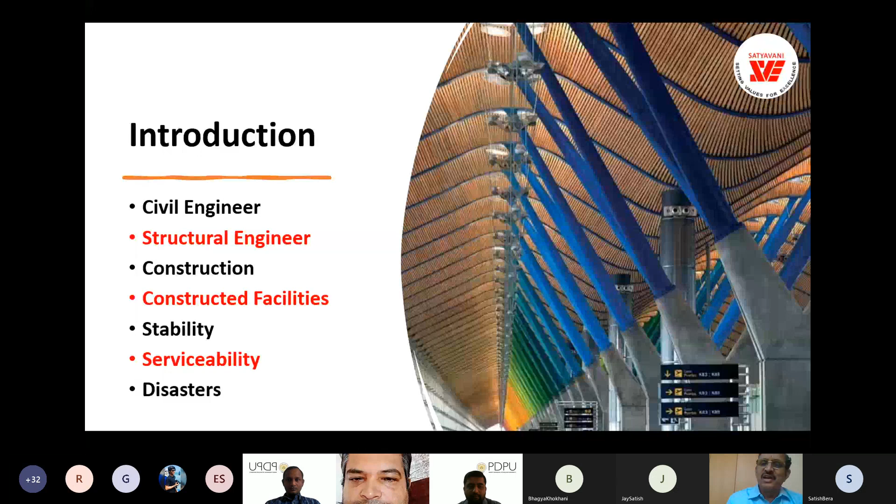That is cyclones. So we deal with cyclones, tsunamis, earthquakes, flooding - all these things. That is the beauty of a structural engineer. We understand all the loadings we have to deal with, we understand the materials we can use, and we know the construction technologies, whether it is precast, the latest 3D printing, or pre-engineered steel structures. That's the beauty of structural engineering, and the pride of a structural engineer, to know how to make a structure live.

So with this brief introduction, I'll start the overview. We deal with structures in housing, transportation, buildings like convention centers, exhibition centers, auditoriums, industrial buildings, power - which is a very essential thing - power generation, transmission, distribution, and end-user utilization. Next is communication. If we are working today on the internet or telephone, it is all communication.

And then irrigation - irrigation is mainly for water supply for agriculture. That is a very important thing. We all know the food - we deal with roti, kapda, or makan. Kapda comes from cotton, agriculture, and industries, textile mills, which we design again, and then garment manufacturing. All these we deal with - roti, kapda, or makan. This is the most important role of a structural engineer, and in general, a civil engineer.

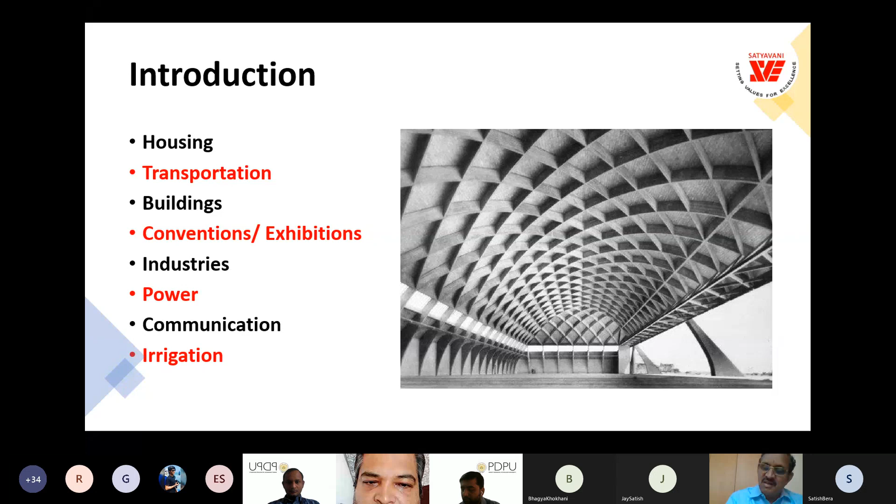Sports stadiums - we know every time Olympics happen, we see a new type of structure, whether in China, Britain, or now Tokyo. Unfortunately, the Tokyo Olympics didn't happen. And tourism, entertainment, hospitality, leisure - we had opportunities to work on leisure projects.

And temples - the Indian heritage, we all know how beautifully temples are built, and they're also structures. It will be a good subject for us to study even those structures, how they are designed, how they are concentric. The theory of temples is from Sthapatya, which is part of Vastu, so that is also good structural engineering to learn. And bridges - we deal with connecting two ends of a river or two separated facilities. Space structures - that is now gaining importance.

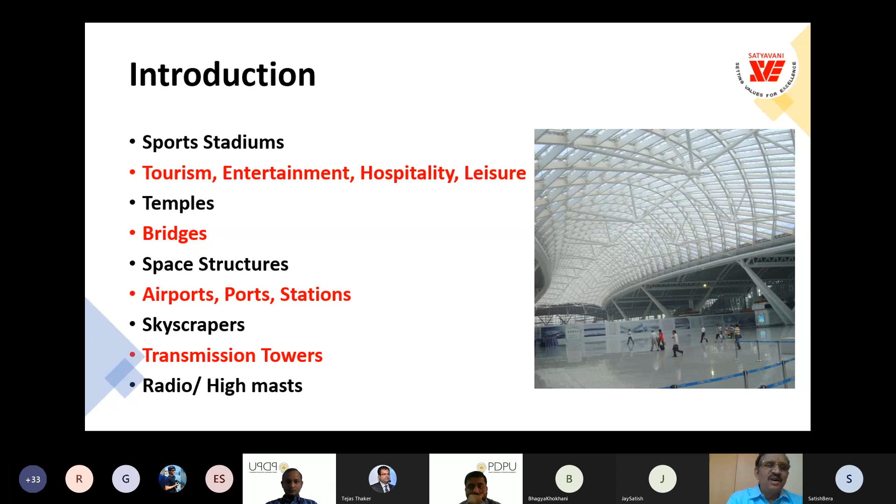We are talking about hotels on Mars, communities on Mars, and so we have to also specialize in space structures, airports, ports, railway stations, bus stations, and skyscrapers. High-rise construction is the norm of the day. You must have seen recently in Dubai, they are coming up with the longest cantilever structure. So we have to keep updating ourselves, with transmission towers for power transmission, radio high masts for FM and all that. There are so many things we can specialize in any of these areas, and I had the opportunity to work in all these domains.

So what is a structure? Let us understand. The role of a structure is to cover, to connect, to support, to protect, and to hold. I'll not go into the details, but just remember these words, and if anyone has any doubt about the terminology I'm using, you can ask me towards the end. A structure must also transfer loads, isolate sometimes in earthquake criteria, and elevate overhead tanks.

Any structure should deal with loads, and we should understand the materials used. We also have to keep in mind the possibility of blast, dynamic loading, impact loading, flooding, cyclone, etc. Earthquake resistance is compulsory for any structure, particularly in India, since we are highly earthquake prone with many seismic zones, and we have to design accordingly.

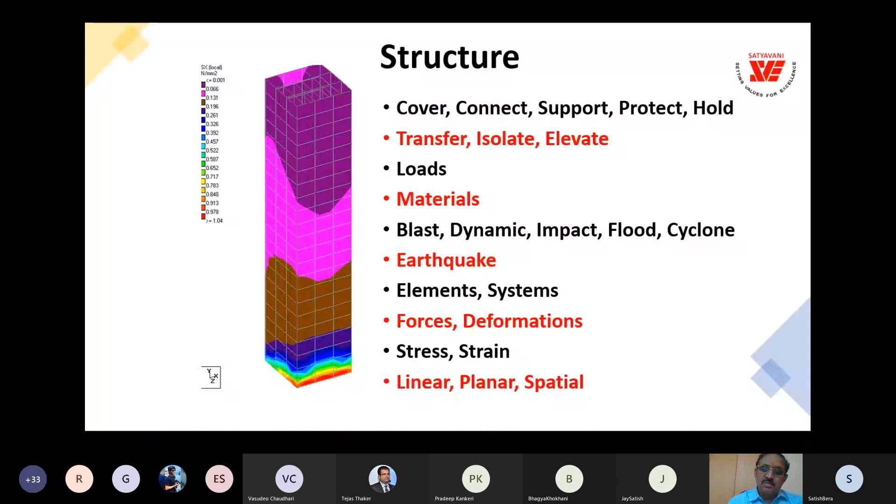We should understand structural elements and systems. Ultimately, we deal with the forces in the members and deformations in the structure or structural elements. We have to keep the deformations within serviceable limits, and design for the forces, allowable stresses, whether it is flexure, axial, or shear, and then strains, plane stress, plane strain, and so on. There are types of structures: linear like beams, planar like slabs, and spatial like domes and 3D spatial structures. So this is about a structure.

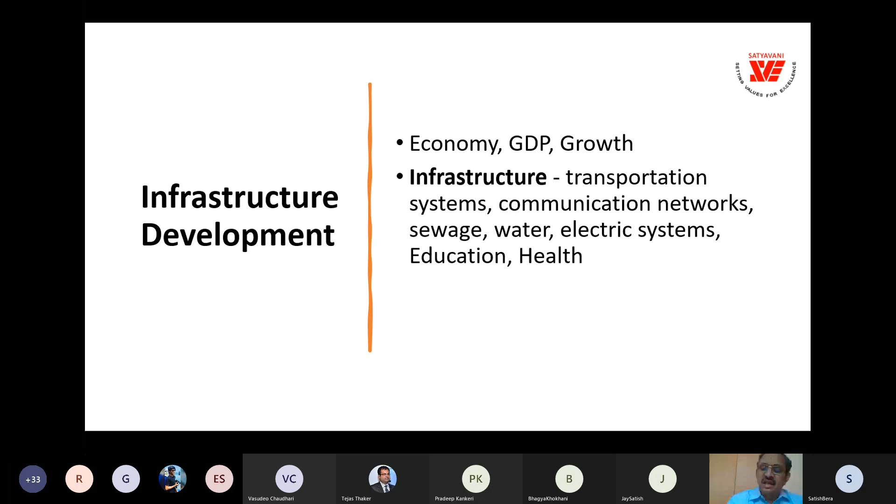Now let us get into today's topic: infrastructure development. Basically, any infrastructure development is for the sake of the economy, to give comfortable and respectable living to the people, humanity, civilization, and citizens. The economy and GDP will grow with investment in infrastructure. So what is infrastructure? Infrastructure is basically transport systems, communication networks, sewage, waste management, water for drinking, water for agriculture, electrical systems, that is power, education, and health. These are all the primary infrastructure areas.

The infrastructure can be categorized into two parts. One is economic infrastructure, which deals with irrigation, storage of water like reservoirs, dams, and distribution channels. Then power, where we deal with generation, transmission, and distribution. Transportation is a huge subject, which I'll cover in the next slide. And communication, we have FM, radio, internet, TV, 4G, 5G, cellular nowadays.

Social infrastructure is essential for any civilization. That is basically education, buildings of schools, colleges, institutions, and universities. Health services like hospitals - yesterday we saw a fire accident in a hospital in Mumbai. It keeps happening, but still people are very careless about following fire safety norms. It's very important for us as engineers to insist on following these safety norms defined in the National Building Code. And sanitation - drainage, sewage treatment plants, and solid waste management.

And housing - affordable housing for the poor, economically weaker sections, and communities like middle class, upper middle class, and ultra rich also. Housing is required for everybody. And water supply - storage of water in reservoirs, trunk mains for transmission of water, water treatment, and water distribution. So these are all the areas in infrastructure that we deal with as structural engineers.

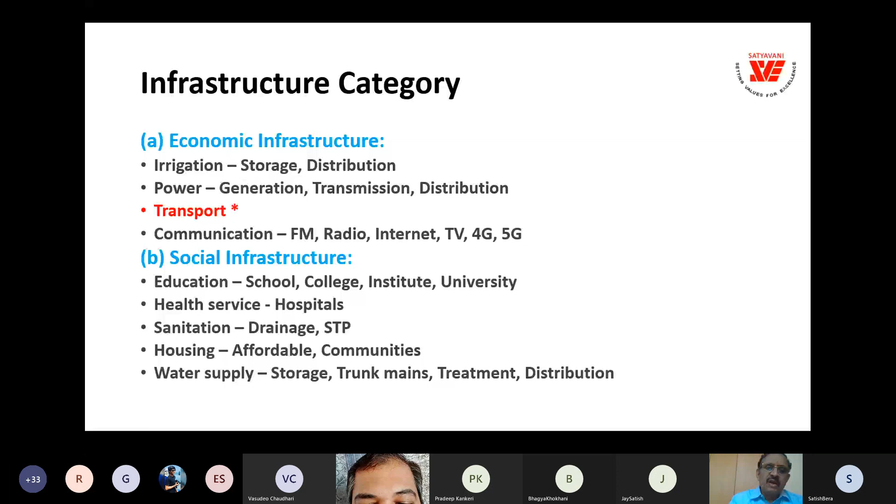Let us go into transportation, because it is a huge area. We now know airports are part of transportation, and space transportation is also going to add to this. Defense and inland navigation will also involve huge transportation - we design runways for Sukhois and similar aircraft. Inland navigation is now being given high thrust because it's a green way of transporting, using water bodies. And rail - dedicated freight corridors, metro, and bullet trains.

Metro is for urban areas, and then ports and harbors, highways - national highways, state highways, and district highways. Now the latest trend is expressways, elevated corridors for expressways without intersections. So for urban transport, we have multimodal transport - metro trains, bus rapid transport, mass rapid transport, monorail, light rail transport. These are all the urban transport systems that exist, and fortunately in India, all these are happening now. You can study any of these and specialize in any one of them. And transit hubs is the next thing.

What is happening is you have the intercity connectivity, interstate connectivity, national connectivity, and then we have the within-the-city connectivity. So you will have the transit hubs, and people should be able to transit between these modes of transport. So these are all the things we deal with in transportation.

Now let us go into the details of structure. We should understand the material properties of the structural elements: Poisson's ratio, coefficient of thermal expansion, elasticity, rigidity, modulus of rupture, specific gravity, toughness, hardness of the material, plasticity and ductility. These are all the properties we should have an idea about regarding material.

And then section properties: the area of cross section, moment of inertia, section modulus, radius of gyration - all these we should understand and have a clear understanding of the concept.

Next is the phenomenon of buckling, creep, sag, shrinkage. Sag happens for the tensile cables actually. And the natural frequency of the structure, time period of the structure, the resilience of the structure, the stiffness of the structure and structural elements, and the structural behavior, symmetry in the structure, and the boundary conditions.

Like we have this hinge, fixed, roller, and clamped boundary conditions.

Are you able to hear me? Yeah. Yes sir, yes sir. Okay, thank you. Because suddenly my screen has become plain.

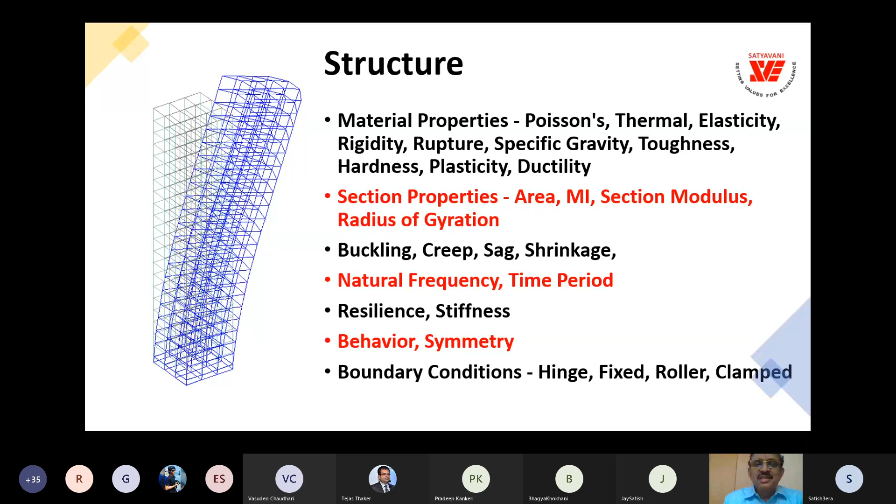So boundary conditions - as a structural engineer we should have the understanding of what is hinge, what is roller, what is fixed condition, and what is the clamped condition. So these are all the things we should know about structure.

So what are all the structures we deal with? This is a metro. This is Vadodara only, a bus station. It has become viral actually. This looks so nice, people can't believe it's a bus station.

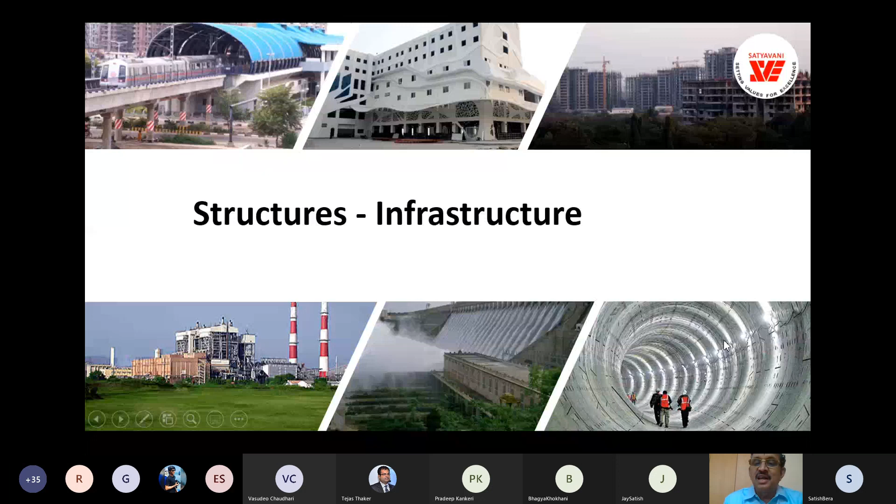And this is the mass housing happening everywhere in the country now. And this is the power plants, we have the irrigation dams, and in irrigation dams the byproduct is power generation also. And these are the underground tunnels in metro. And this is Bandra-Worli Sea Link bridge, and we have this wind power generation, wind turbines.

We have the airports and highways happening everywhere in the country. Highways also involve structures like grade separators and bridges, and then airport air traffic control and all that. And the most interesting structure is cooling towers in power generation. So these are all the types of structures we deal with.

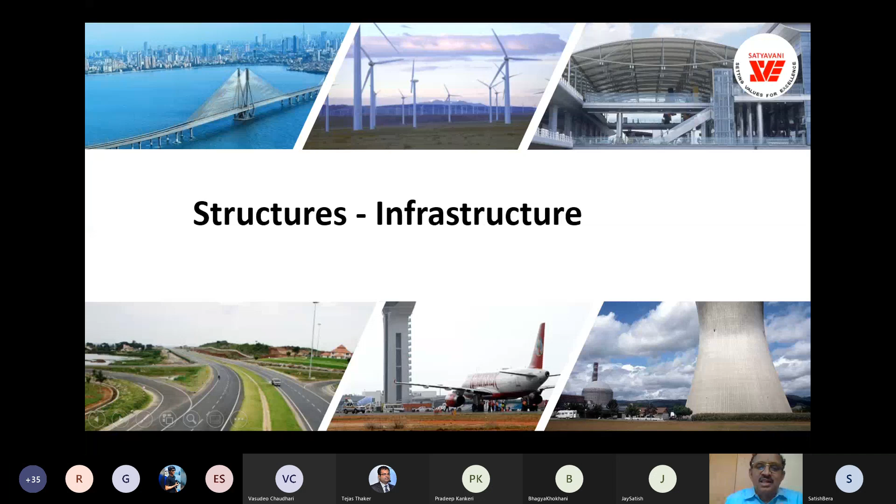And what does a structural engineer do? What is the role of a structural engineer? We are slowly getting into the topic - that is the design intent. We understand the intent for the design, that means who are the end users and what are their requirements, we understand, and we prepare the design basis.

And then we understand the standards to be followed, Indian standards or manuals also. Sometimes if the code is not drafted yet, if it's an evolving technology, we prepare manuals. Like I made an attempt in communication towers when there was a flurry of implementation of towers. I didn't find the relevant standards, so I prepared a manual involving all the industry stakeholders, and that became a basis for our work. Over a period, the manual gets converted into a standard.

So methods - this is another thing - methods of construction, methodologies of implementing each activity, and practice. The practice is certain things you should know outside through internship, to understand the practice.

Next, what are all the structural forces that we deal with? The compression, tension, shear, axial forces, bending and torsion, in-plane stress, in-plane strain. These are all the forces that we should understand.

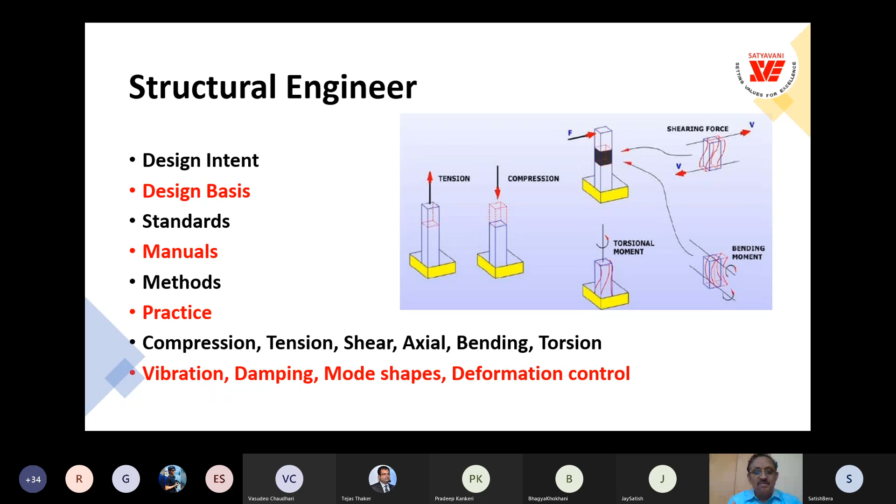So vibration, damping, mode shapes, deformation control - these are all the things we can play with. We can play with the stiffness, we can play with the deformation, and we can also understand the mode shapes of the structure behavior.

So we do testing, simulation, and we make models, and we investigate the forces and stresses, how they behave under various tests. In fact, I have even been involved in prototype testing of towers. That's a common thing, but it will be an experience as a structural engineer to be involved in this prototype testing.

This is the model testing, and investigation of the loads, investigation of the soil, geotechnical, investigation of the topography and all that. Large spans we deal with and tall structures we deal with require this kind of testing. And robustness - structural robustness means you remove one column and still the structure should be stable.

That is the robustness we should check. And limit states—we know the limit state of collapse, limit state of serviceability. All these limit states we should understand for the behavior of the structure and the performance of the structure.

Ultimately, we have to also know as a structural engineer about repair in case the materials don't meet the specified standards and the technical particulars. Rehabilitation of the structure which is distressed in case, restoration of the structure, and retrofitting.

Retrofitting means, every 5 years, 10 years, the codes keep changing, our requirements keep changing. Nowadays people are talking about work from home, so the houses need to be retrofitted to accommodate work from home and family meetings online. This is called retrofitting. Similarly, structures, when the codes change, we have to retrofit the structure to satisfy the revised codal provisions.

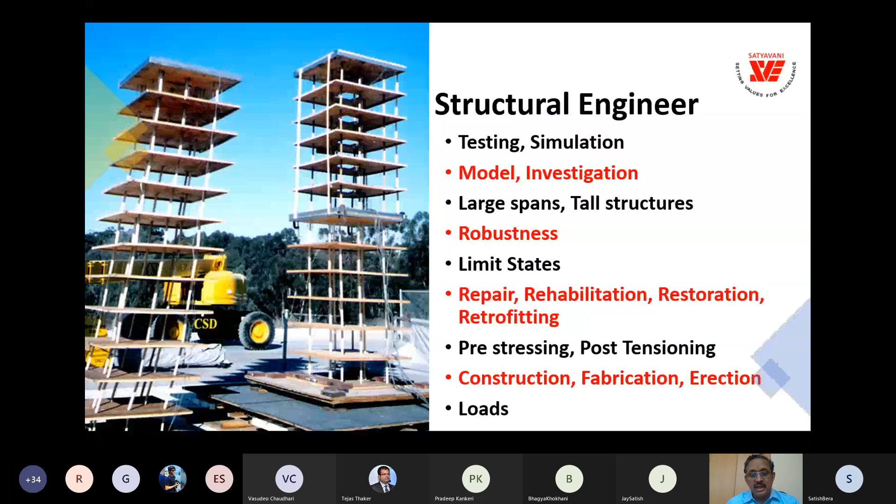And in construction, we should know construction technologies available, fabrication methods, and erection methods—how do we erect. Various experiences we get as a structural engineer, and also understand the loads completely.

Next is acceptance criteria, tolerance in elements like column verticality or column orientation, column dimension, and slab levels before casting and after casting, after stripping. All this we should have the tolerance levels. We should know the code IS 12000.

Fire rating is another thing. We have to give the cover depending on fire rating—half an hour fire rating, one hour fire rating—so the structural element can withstand the fire rating.

And next is water weatherproofing. Weatherproofing is to maintain the temperature of the structural element at the reference temperature for which we design the structure.

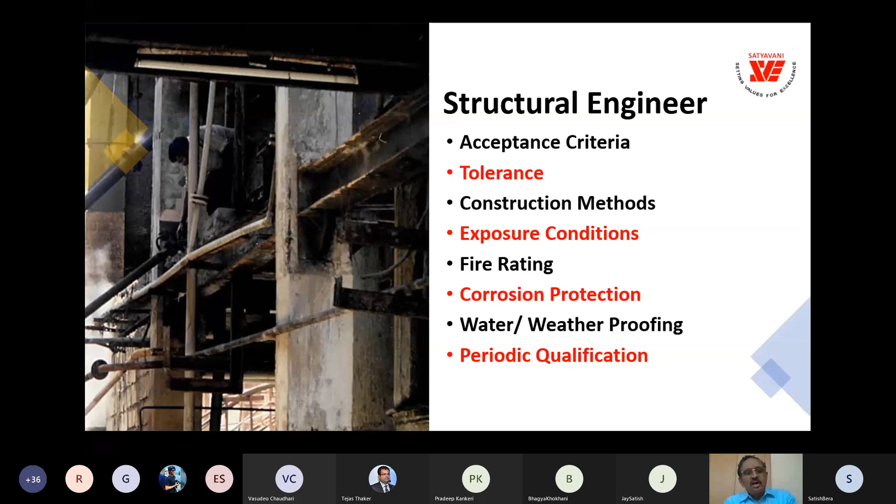And periodic qualification—any structure we design, we can't give a guarantee for life. Like a child born, we do all the tests, but we can't say this baby can live up to 100 years. We have to keep checking periodically. Same way, structures also, every 5 years, it is recommended to have periodic qualification of the structure for the loads designed, for the occupancy it has, and all.

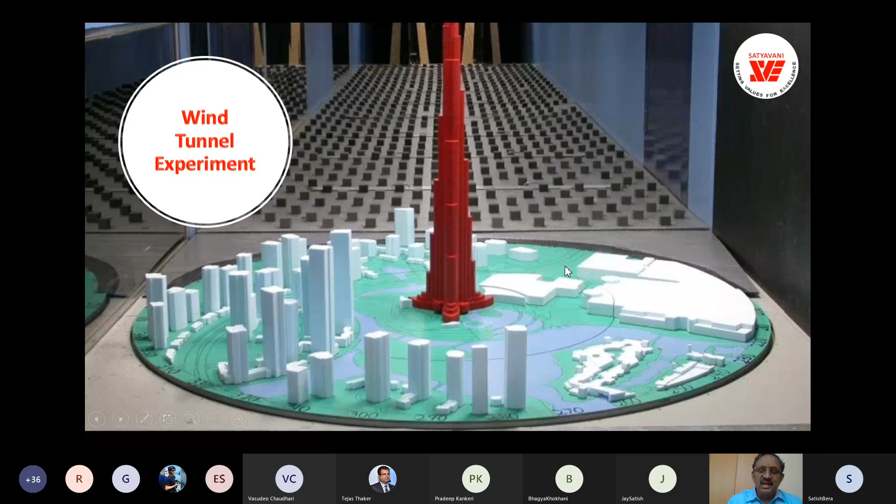So this is a wind tunnel photograph because it is interesting—this is a photograph of Burj Khalifa being tested for wind loads. It's a very interesting story, but I will not go into the details.

So as a structural engineer, we should understand how the loading happens to the structure so that we can make the shape of the structure more efficient. So Burj Khalifa, that's what happened.

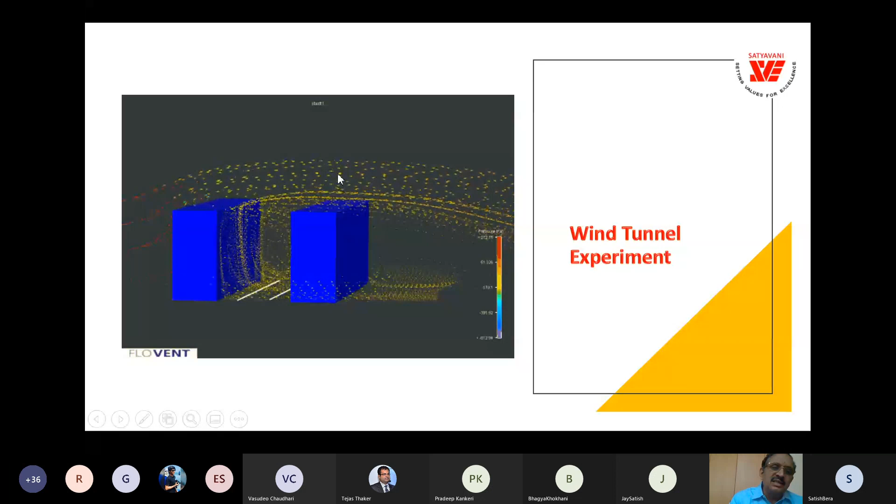And here you can see, once two structures come together, the wind pattern has changed. This is the windward face and this is the leeward face, and you have the drag effect—this is called the drag effect of the wind. When you have multiple structures, this is how you will see the wind pattern on the structures. So it's not in isolation—you cannot take the wind coefficient for one building and design the building. You should understand the various possible conditions and consider the worst case scenario for calculating the load.

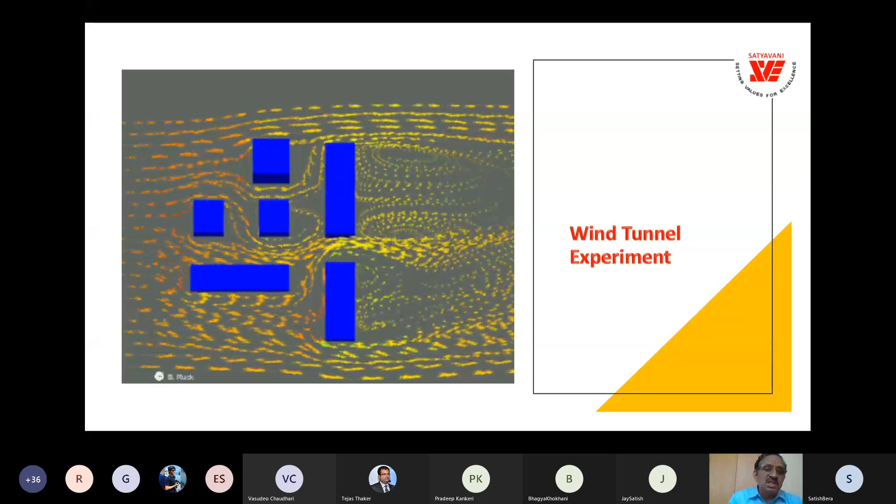So the role of the structural engineer is to first minimize the load effect on the structure. This is what I've shown just for the sake of interest.

And now, what is the role of a structural engineer? We understood the structure, we understood structural engineering, and now what is the role of a structural engineer? We have to suggest the most efficient, optimum, and cost-effective structure, and understand the behavior, stress levels, and failure mechanism. It's very important—if you want to be a good structural engineer, you have to understand the failure mechanism. Only then will you be able to design and detail perfectly.

And loads, 2D design—we have to estimate the loads and do 2D design, that means manually. Nowadays people have forgotten this pencil calculation. You know why we call it pencil calculation? Because you will be able to modify and improve the design. So never go straight onto the computer for analysis or drawing. As a structural engineer, you should draw with your hand, draw with the scale, and do the calculation with a calculator or even without a calculator.

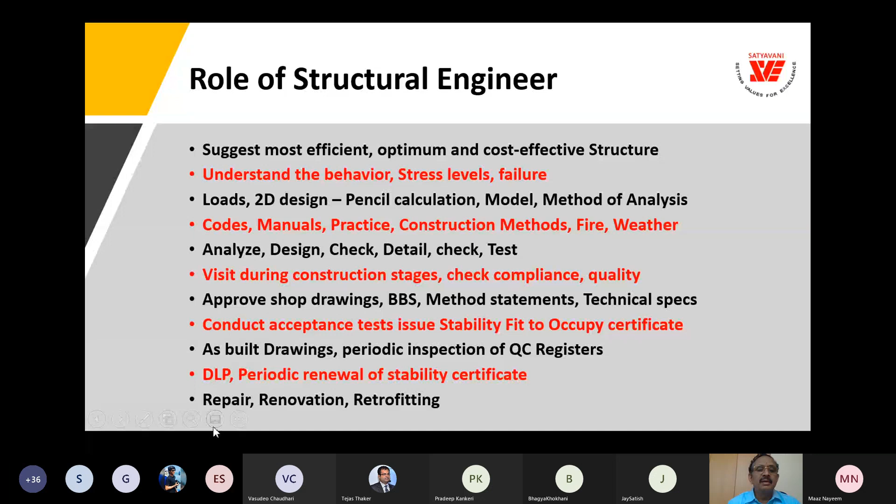And finally, repair, renovation, and retrofitting also is our role. Safe, serviceable, sustained structure, protecting from natural and man-made disasters, knowledge of materials, methods, behavior, loads, systems, technologies, standards, codes, proof check, peer review, and testing of loads—like pile load test and plate load test we do. All these are required.

Testing of the structures also. As per IS 456, we have the method of testing. In case of dispute about force estimation or deflection control, it is recommended to go for the test. Know failure mechanism—detailing is to prevent failure, actually the last resort. Design for serviceability and estimate the actual stresses to be within allowable or limit stresses. So this is the main job of the structural engineer.

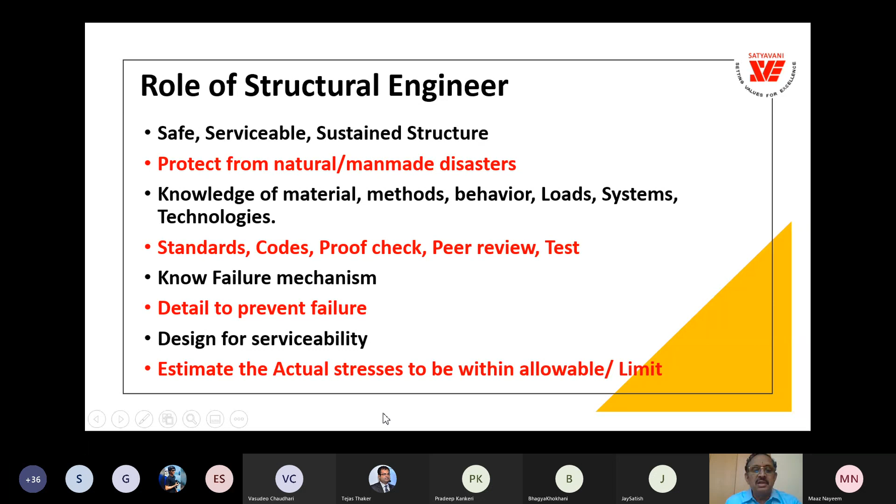And then soil structure interaction—we should understand foundation design, slope stabilities. When we excavate deep or do the filling of earth, we should have the understanding of slope stability. Though it is a geotechnical job, a structural engineer should have the basic understanding of all these things, because ultimately we have to take care of the slope stability also. Hydrostatic pressure—that is underground structures, water retaining structures, and highly corrosive structures.

Collective responsibility of a structural engineer is to plan, design, do the geotechnical investigation, proof checking, and supervision. So: planning engineer, design engineer, geotechnical engineer, proof checking engineer, supervision engineer—5 engineers should jointly take the responsibility for the stability and performance of the structure. And quality plan, quality assurance, quality control, quality audit, and quality vigilance—these are the terminologies, and it's the role of the structural engineer to ensure all these are in place for important structures.

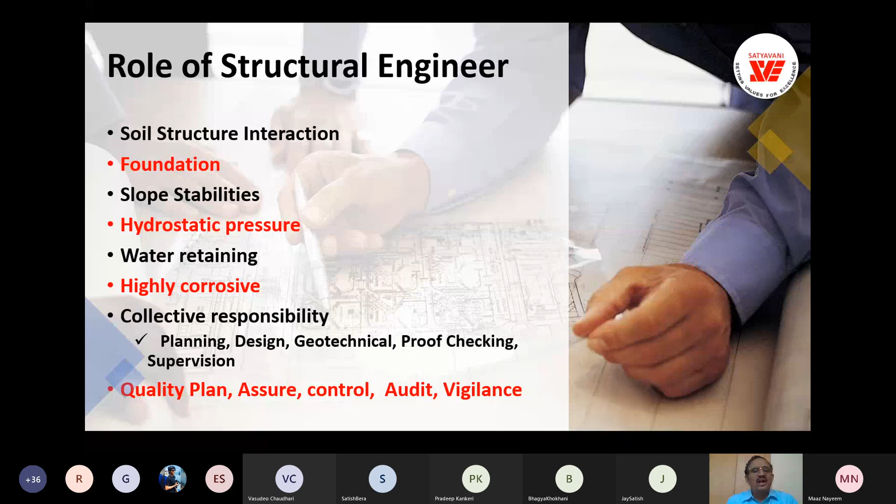Detailed investigation like geology, geotechnical, hydrological, topographic, meteorology—meteorology means rainfall, temperature, and all this—and environment. We should also have an understanding of the ecology of surrounding places, like forests, lakes, rivers, seashores, and so on. We should also understand earthquake, cyclone, fire, blast, flood, and construction practices. So this is the role of the structural engineer.

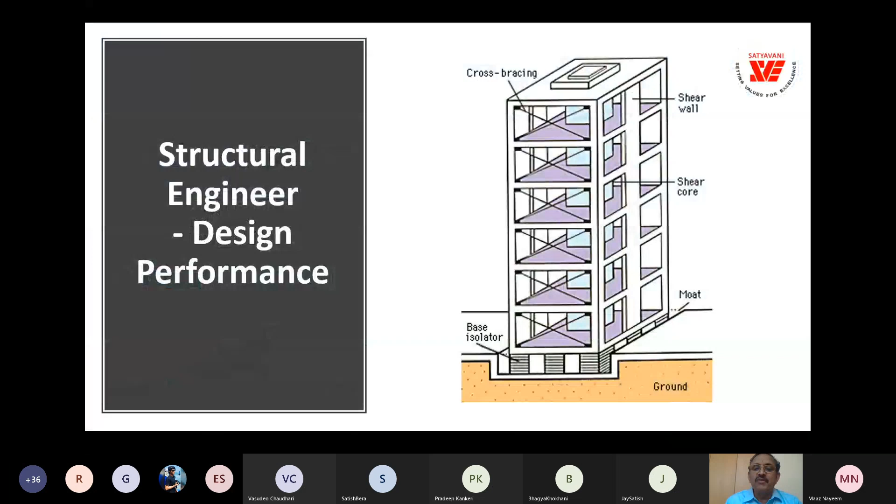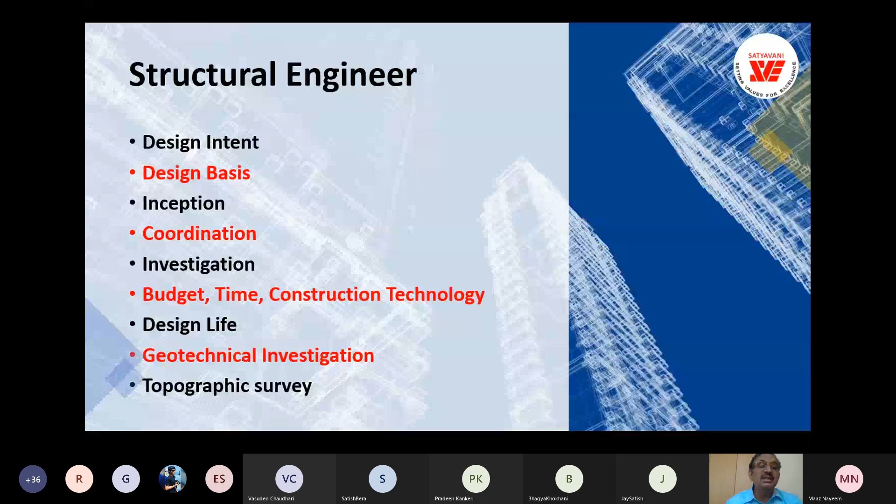And then, as I explained already: design intent, design basis, inception report, coordination, investigation, budget, time, cost, construction technology, design life. Service life design is an emerging new specialization actually.

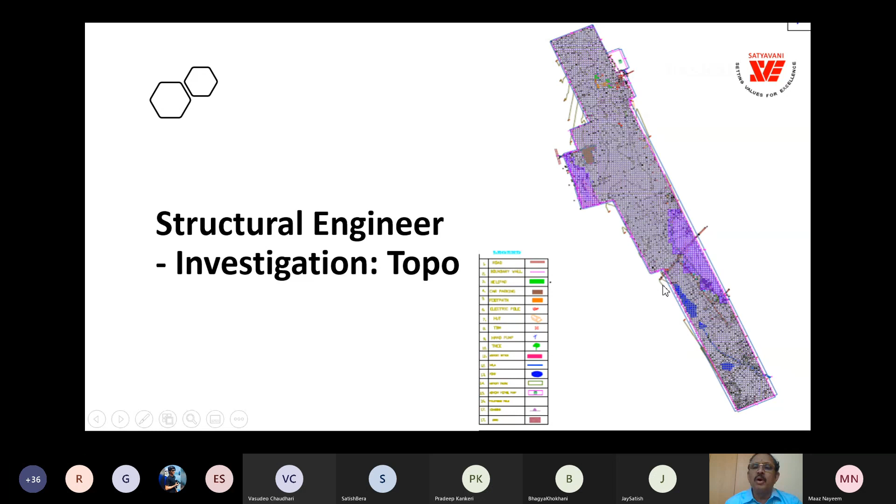We should also have the idea about investigation, topographic survey. Normally you end up surveying up to the boundary, but you should also go beyond the boundary and understand the surrounding structures as well.

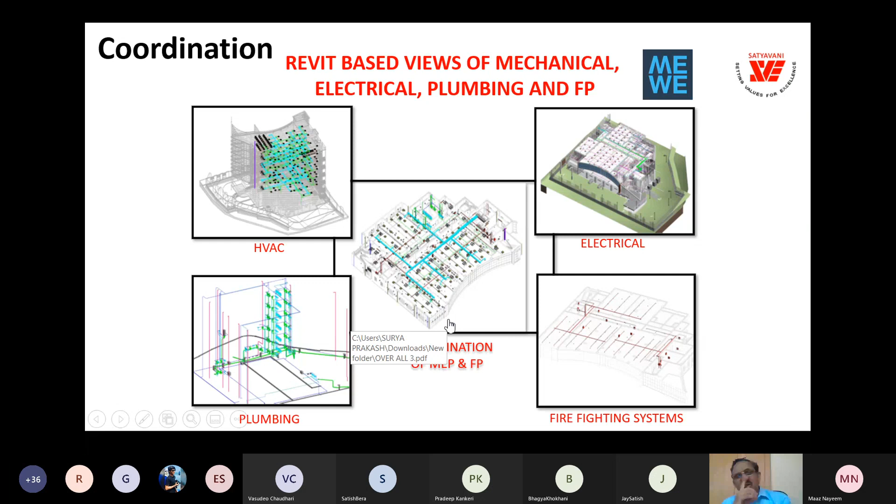Next is coordination with air conditioning, electrical, plumbing, and firefighting. This is a coordinated drawing with the structure ultimately. The structural drawing that we make should accommodate all the services in the building.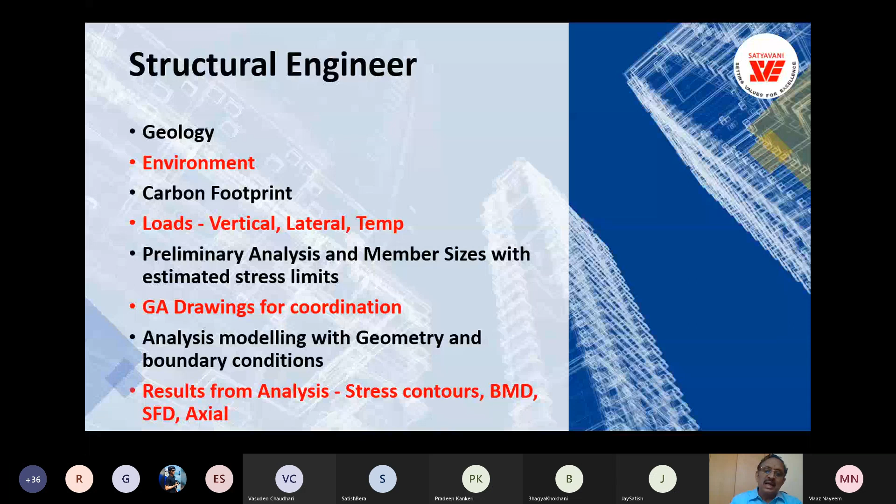You should compulsorily, once you analyze, study the results of analysis. This is called post-processing - the stress study, how the stress is varying in the structure. As a structural engineer, we should understand the stress pattern in the structure.

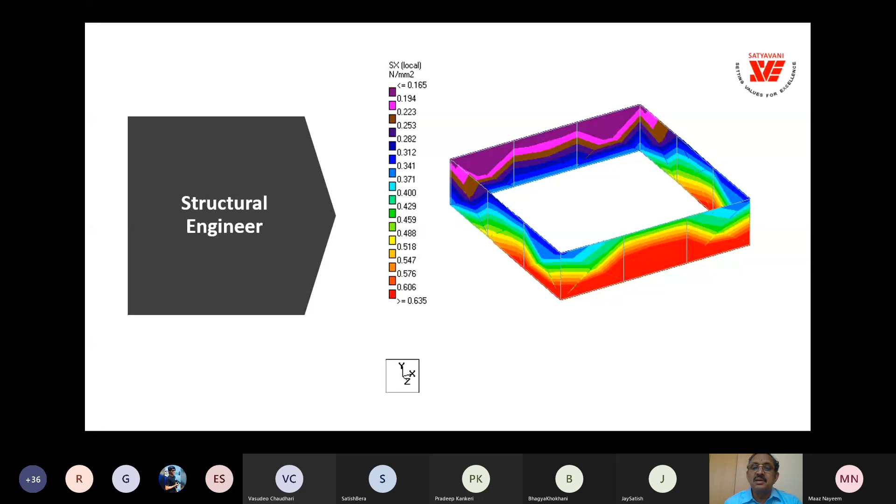Check construction engineering, that means how it is going to be constructed, and loads during construction, and define construction methods and specification schedule, and periodic visits during construction to check compliance of the drawing, as-built drawing.

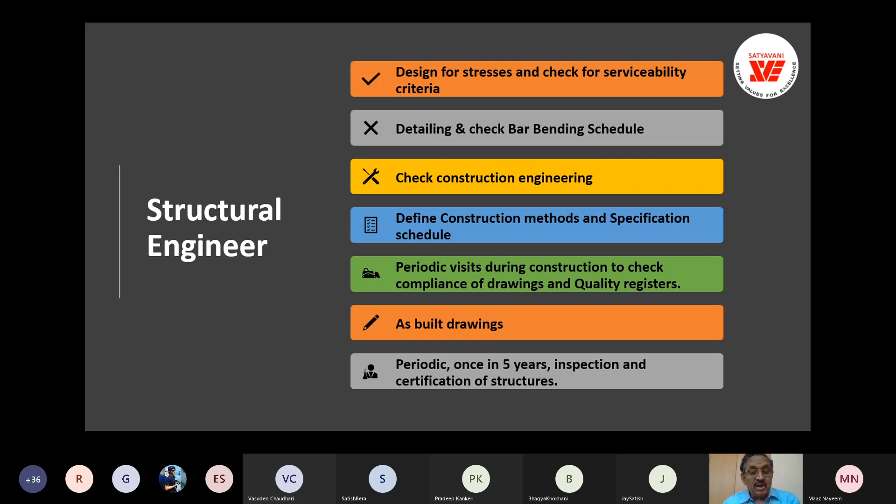Please don't think I am repeating, because these are all important. I am telling again and again.

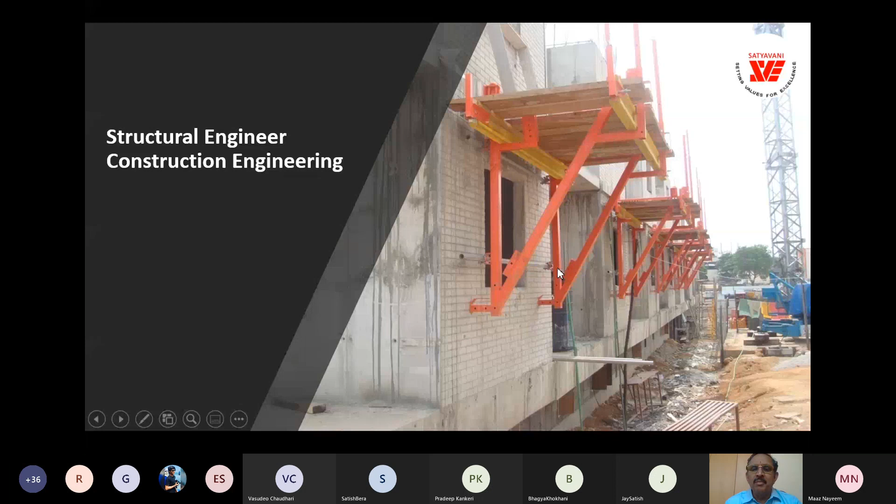This is the construction method. For example, just for casting the sajja here, the sunshade - how much of construction engineering you see, taking support on the wall, and this is the bracing for these brackets and all that. So you should have the complete understanding of the construction engineering.

Finally, structural engineering is a challenging career, and you are satisfied seeing the outcome of the structures that we design. It is the ultimate happiness, I always say, as a structural engineer, if you are a good structural engineer, and perfection in design.

In fact, in the world, anybody is expected to be most perfect, it is a structural engineer. Everybody will ask why you have provided more steel, and if it is deflecting or if there is a crack, why you have not prevented this.

Everything, they expect heavens from the structural engineer actually, and we create these heavens actually. So that's the satisfaction that we have.

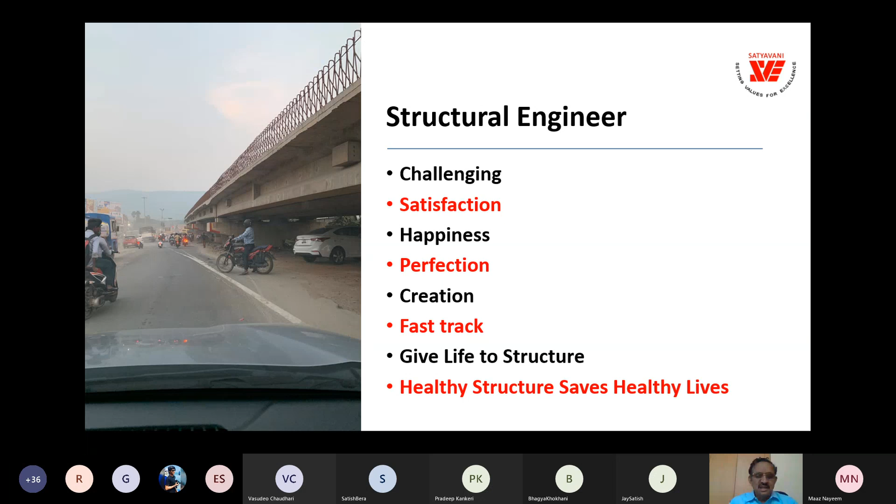Fast track projects is the order of the day, and we give life to the structure. You all know healthy structure saves healthy lives. So if so many people are not affected, it is because of the structural engineering practices they're able to design.

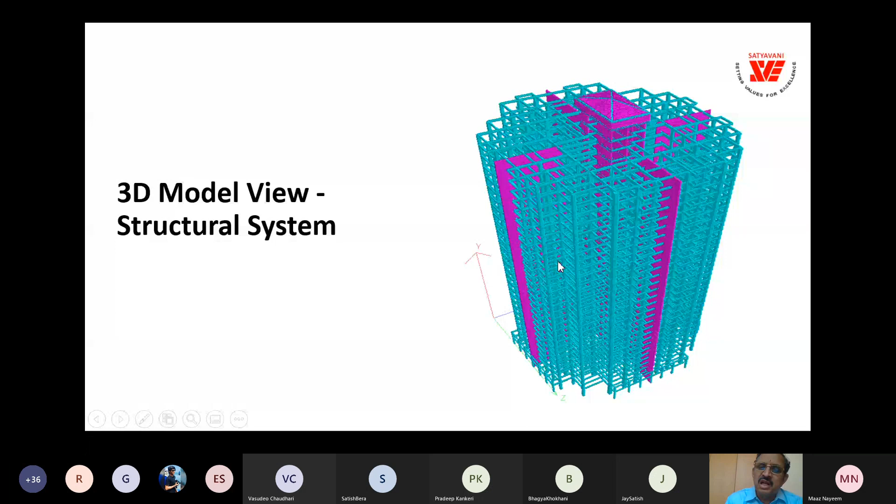So here is a 3D model structural system, I'm just clearly showing shear wall and central core and a frame structure taking the support. This is called a buttressed core actually, so the shear wall is buttressing the core here.

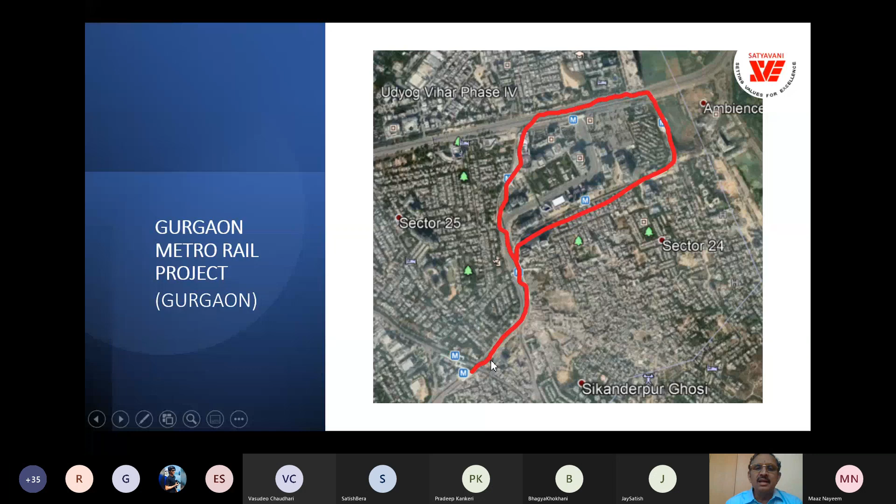This is a metro rail in Gurgaon. We have done the rapid metro rail Gurgaon here. This is the 6 stations we have designed, and this is when you go to Gurgaon, we can see this.

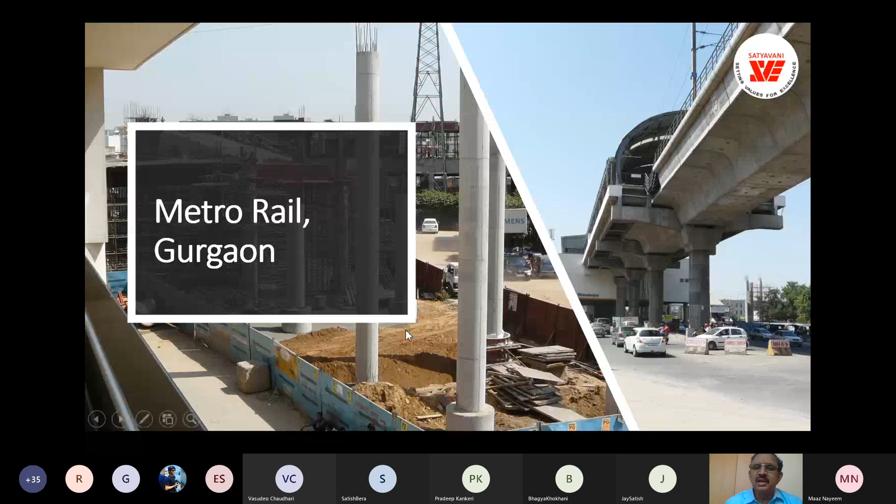We have used precasting in this project. These are the actual photographs of the stations, and you can see the precast girders here. This is the drone view of the station which is designed.

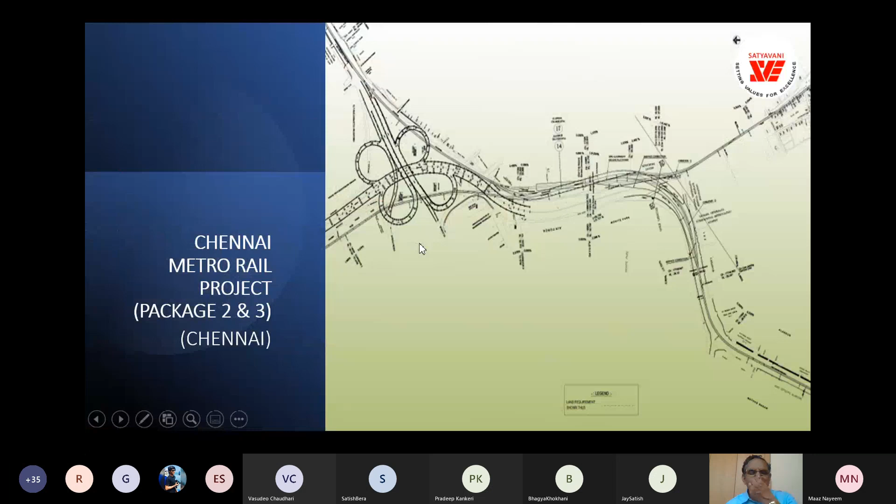And Chennai Metro also, we did the pre-bid design for one of the contractors.

This is called Rotary management system. That means you know the Rotary, you know grade separation - here these 2 are combined. You have 3 grades - below ground, ground, and above ground. Above ground is used for heavy motor vehicles, ground level is used for pedestrians, 2-wheelers, autos and rickshaws, and below ground is used for light motor vehicles like cars.

So this is the design we have done in Vizag, completed recently, and this is the Google view of that. This is useful where you have 2 national highways intersecting in an urban scenario. You can see one national highway, and another national highway, and there is an existing rail over bridge already, and still we have designed 2 limbs for this, and this is the Rotary above, nearing completion now.

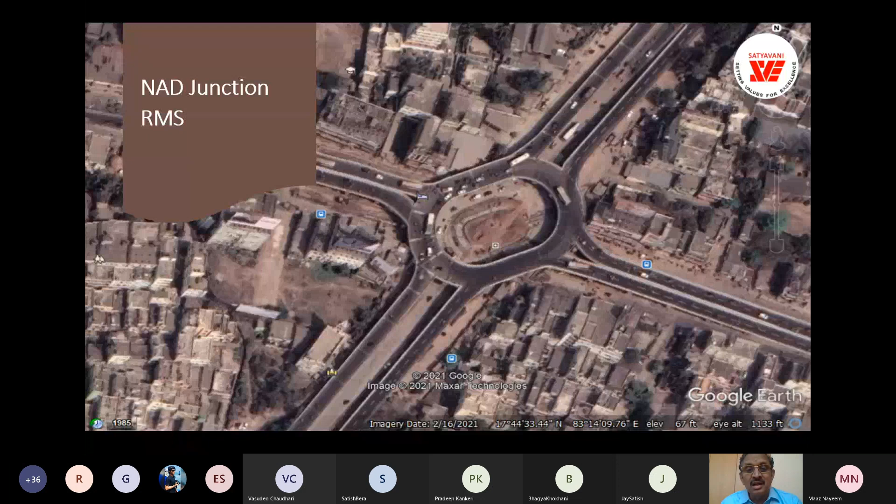This is the interesting infrastructure development we did, and these are the photographs of the structure. We have used precast pre-stressed I-girders, and this is the deck being cast with temporary shuttering. This is the girders erected, and this is bearings and all.

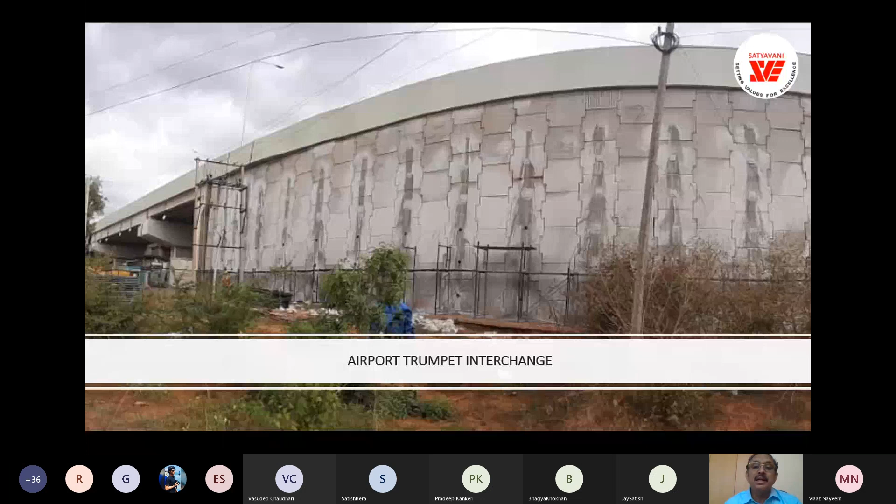This is another trumpet interchange in one of the airports where there was a distress in the RE walls, which we have restored. We all take it for granted, once this is done it will perform. In fact, in this case there was a distress in this RE wall and a problem, and we had to rehabilitate this RE wall, and we have done it.

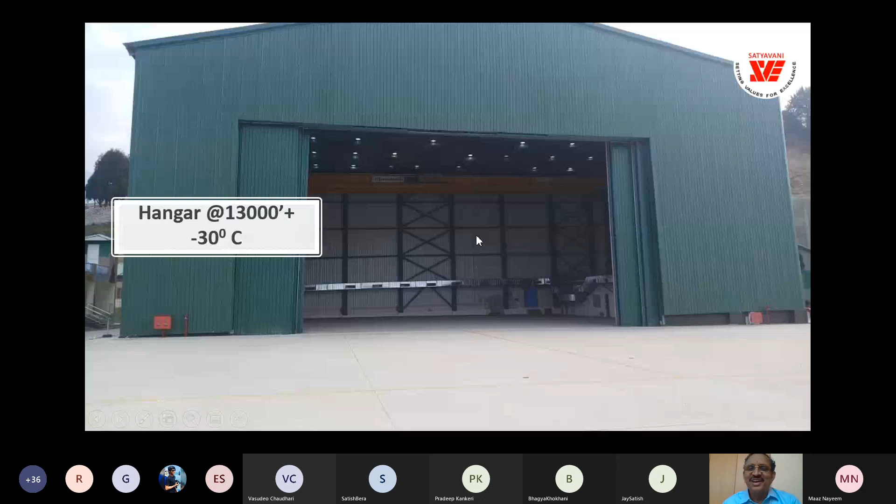This is a hangar, interesting 45-meter span, at 13,000 feet above mean sea level, with temperature ranging from minus 30 degrees to plus 20 degrees. These are the doors, automatic closing doors, 30 meters length, 30-meter wide, 100 feet wide door. Sliding door, and the height is more than 10 meters. This is a 10-meter door. So it's an interesting pre-engineered structure we have done.

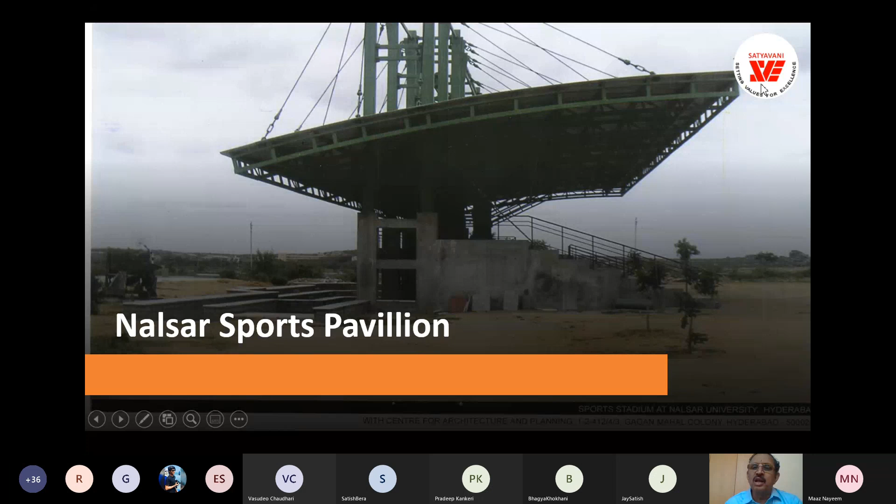This is a truss kind of structure, and this is the farther view, clubhouse of a housing society we have done. And this is a sports stadium with cable support we have done, 12-meter span sports stadium in Nalsar University.

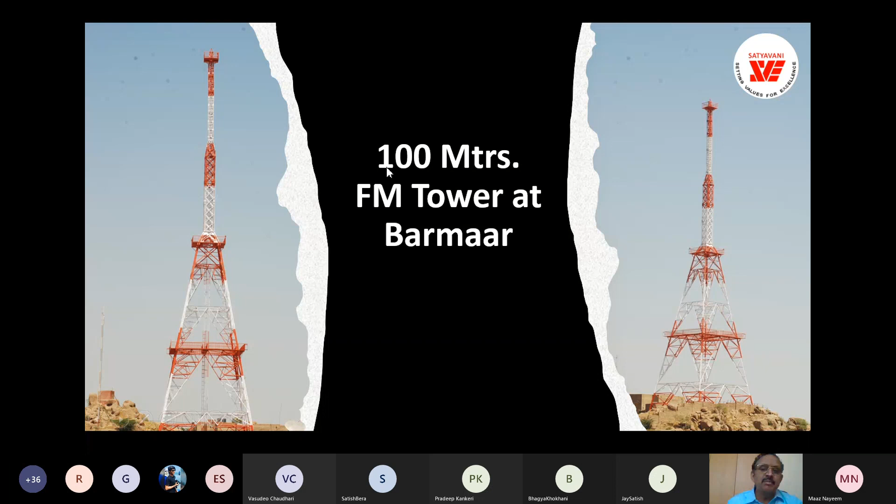This is a 100+ meters structure. In fact, the tallest structure I have designed is 100 meters tall, an FM tower in Barmer, Rajasthan. These are very interesting structures, and these are 90-meter communication towers in Gujarat also. We have done Birla, AT&T, Ericsson, Airtel - all these people, we have done these tower designs. This is a 90-meter tall tower, and in Gujarat we designed 80 meter and 90 meter tall towers also.

These are the monopoles. You can see a 40-meter concrete spun concrete monopole, pre-stressed. It can be erected in 2 days, and it's very interesting. We have developed this design with the concrete 40-meter monopole, high lighting mast, and precast piles also. This can be utilized.

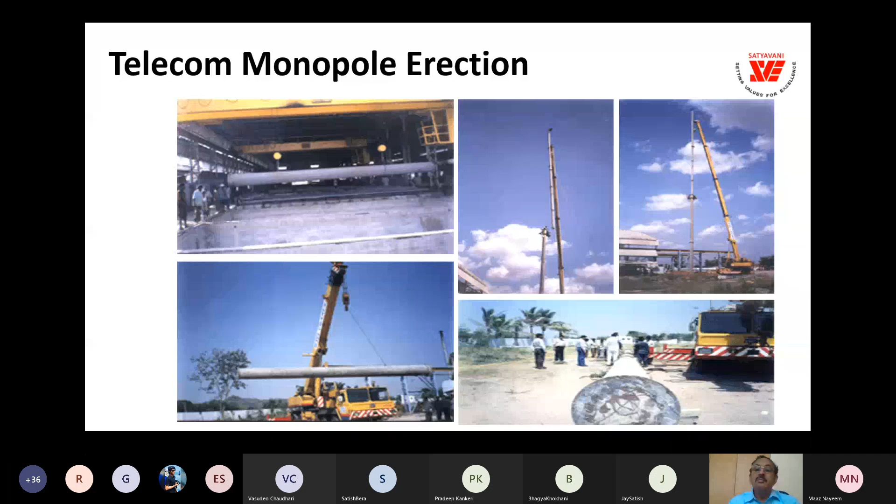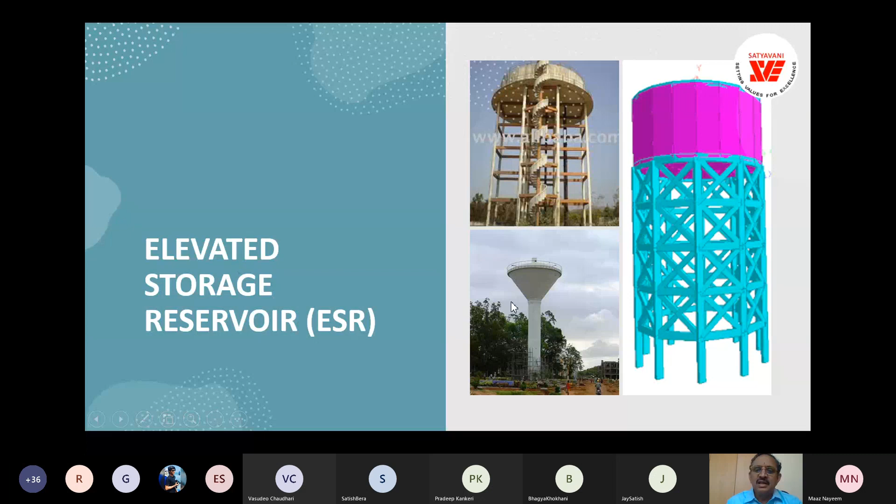Very interesting thing, elevated storage. This is the actual thing, and we model the structure like this, a funnel type elevated storage reservoir. And this is a detailed drawing of the elevated storage reservoir.

And these are the effluent treatment plants in Tamil Nadu, 7 districts we have designed for this very highly corrosive effluent treatment plant.

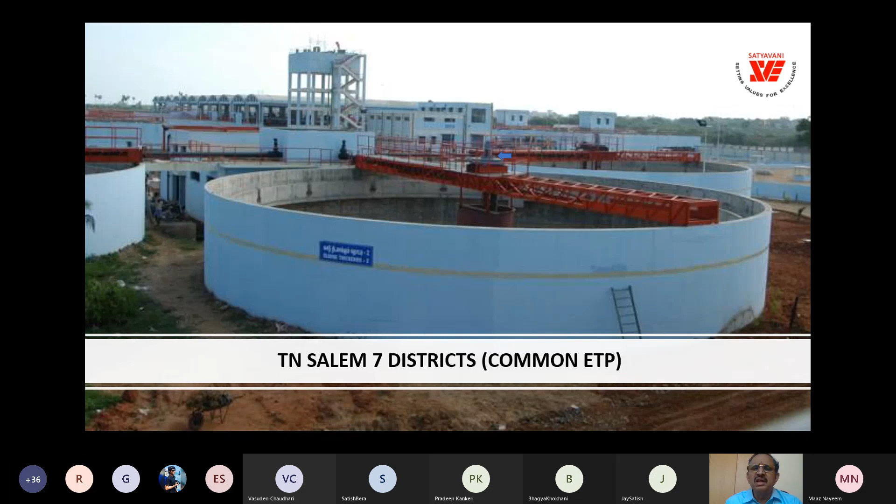This is my first project as a consultant, a jetty into the sea, 70 meters into the sea, called a seawater intake jetty. From here it is 1.2 kilometers aqueduct, and then we have a box girder crossing canal. This is the canal, and then reservoir intake structure, and this is the reservoir of 6 lakh cubic meter. This is a very interesting design we have done as structural engineer.

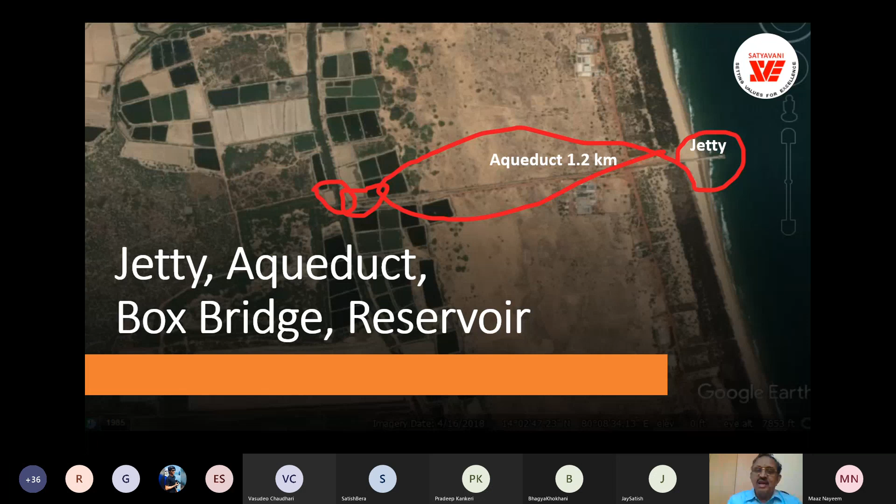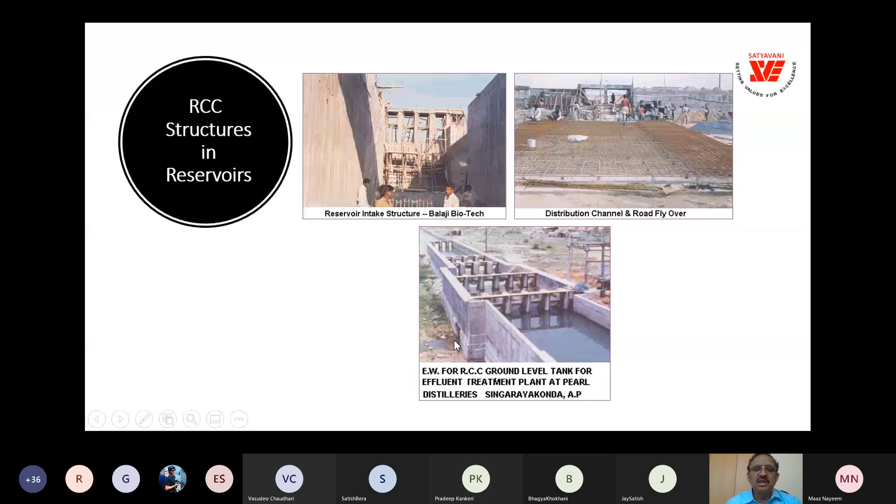And these are the photographs. This is the reservoir intake, and this is the aqueduct and distribution channel. This is the distribution channel after completion. These are the Almatti Dam aqueduct, and this is the foundation for the road bridge being done.

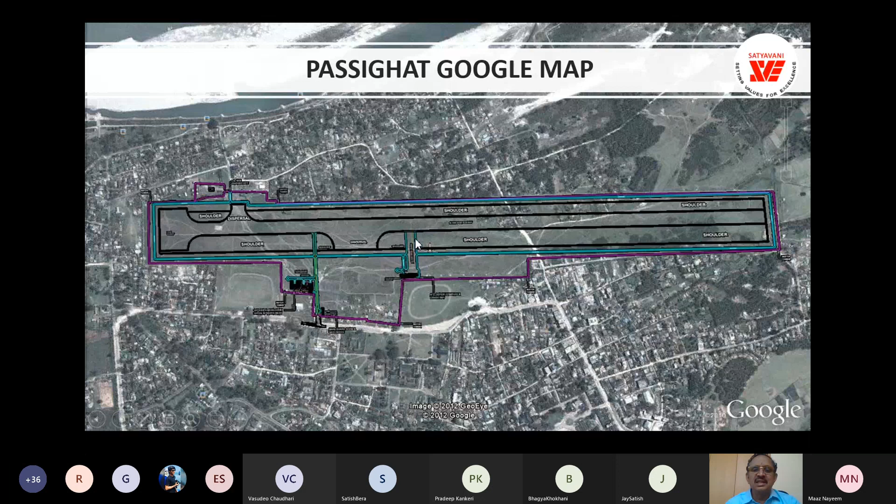And these are the interesting runways we have done. Before construction, we use Google Maps and plan the boundaries and levels like this. After construction, this is the photograph. And this is another location, this is after construction photograph, taken from the aircraft.

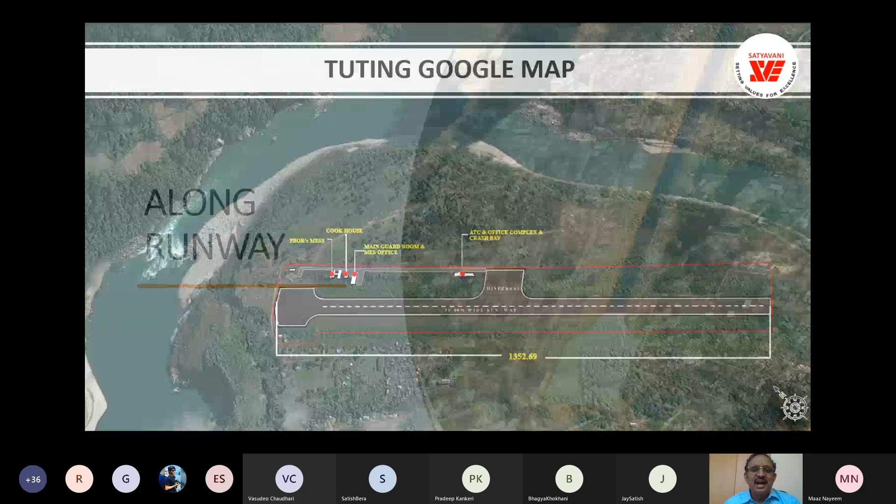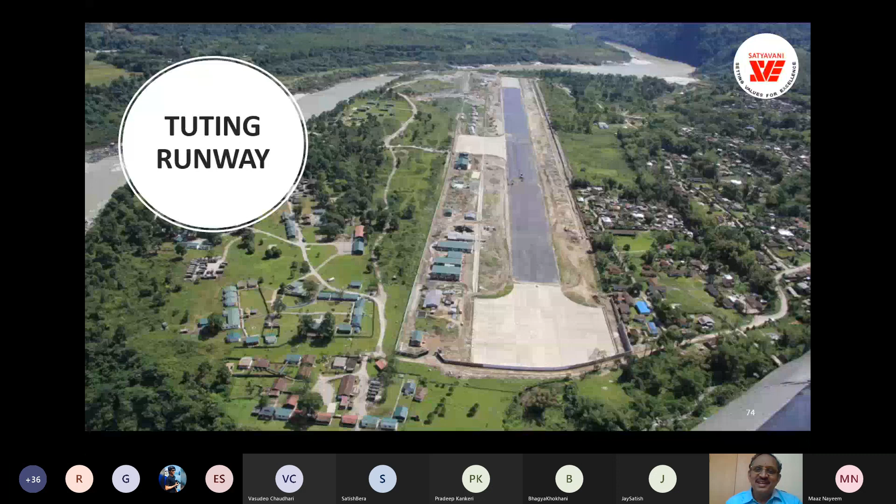This is another location, Tuting on the Chinese border, we have designed, and this is the photograph from the landing. Actually these photographs are sent by my client who are landing on this runway. We have done the infrastructure facilities, and design of these structures is very interesting.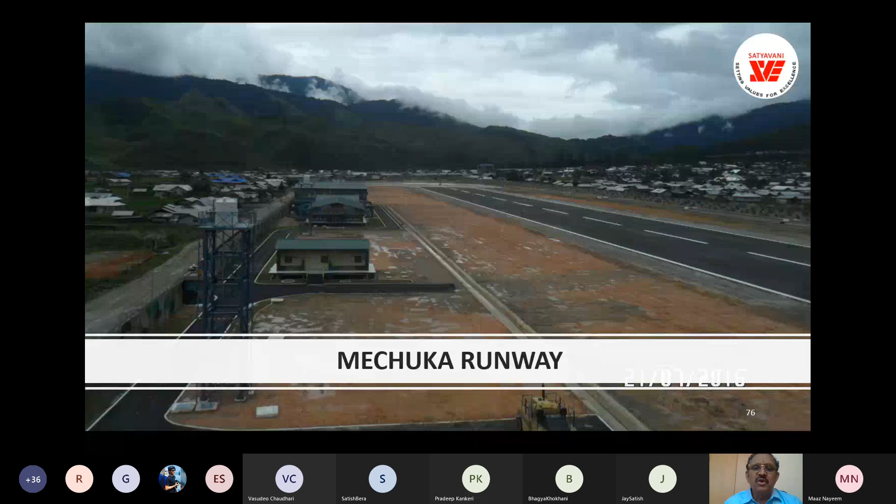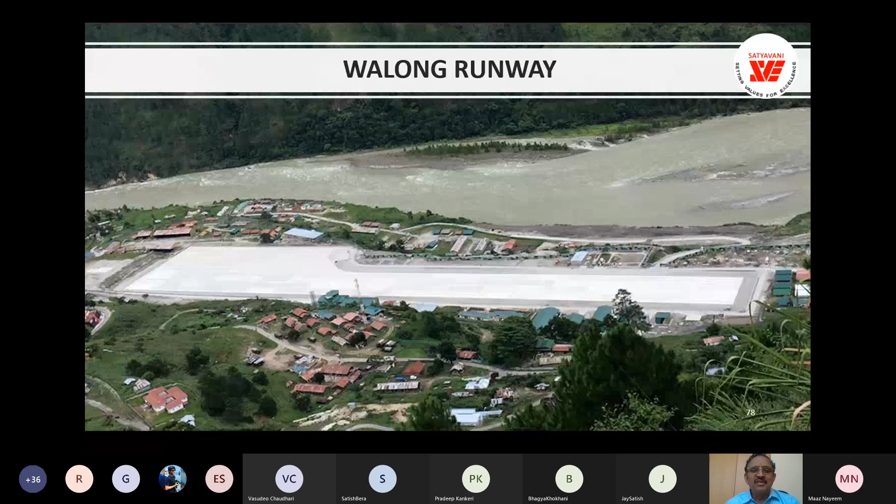This is another Mechuka location, again 8,000 feet above mean sea level, and this is the actual photograph of the flyover, the runway. This is another location, Ziro in Arunachal Pradesh, and this is Walong, again on the Myanmar border. So this is the runway we have designed, and Dundigal also in Hyderabad we did.

And then cross drainage works for irrigation canals, you can see these.

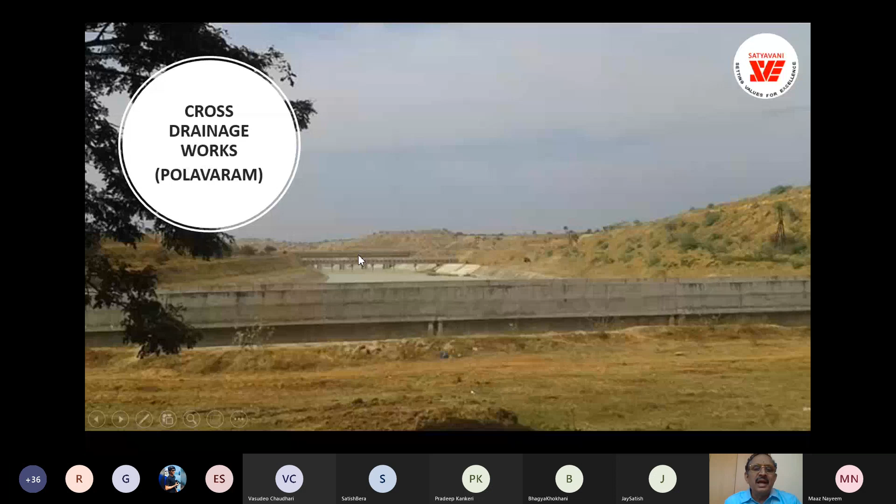River means there is an existing water body, and we connect two sides of the river with a bridge. When a canal is planned, we are separating land mass into two pieces, so we have to connect them. So we designed about 18 cross drainage works for a canal in the Polavaram irrigation project.

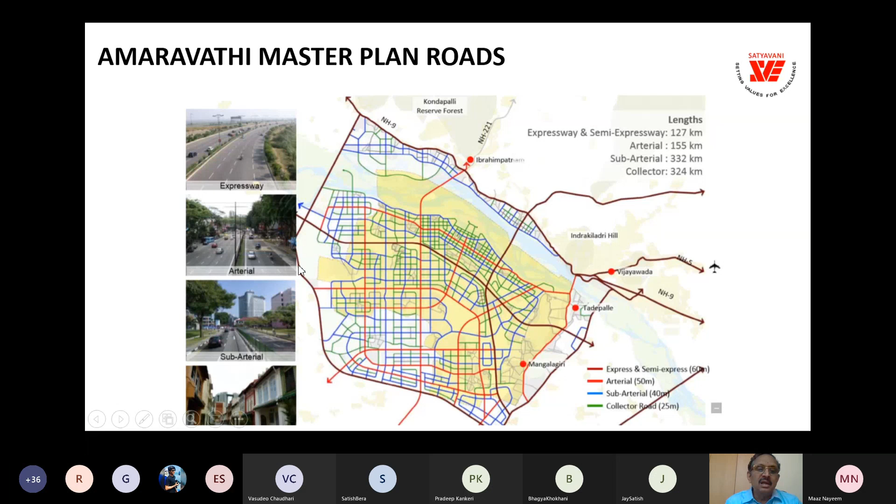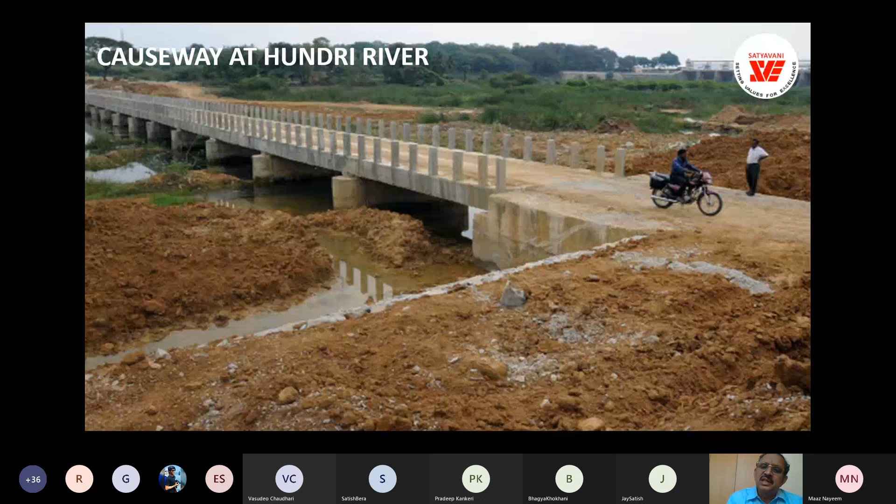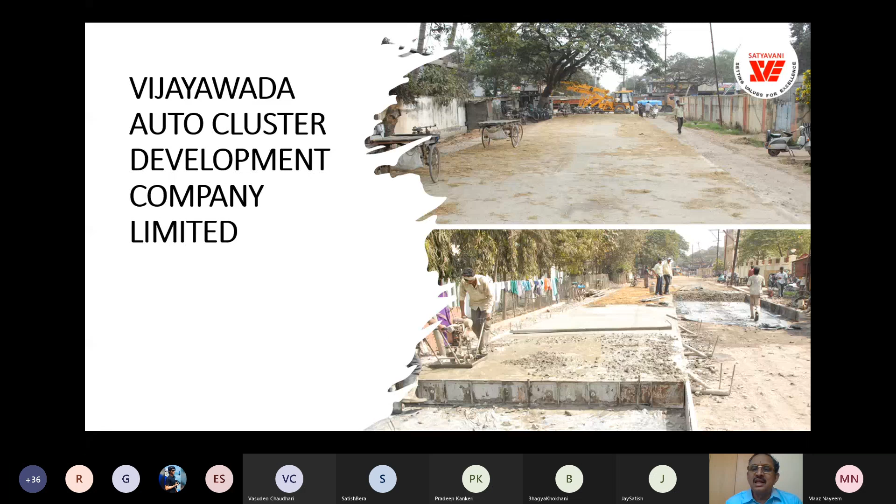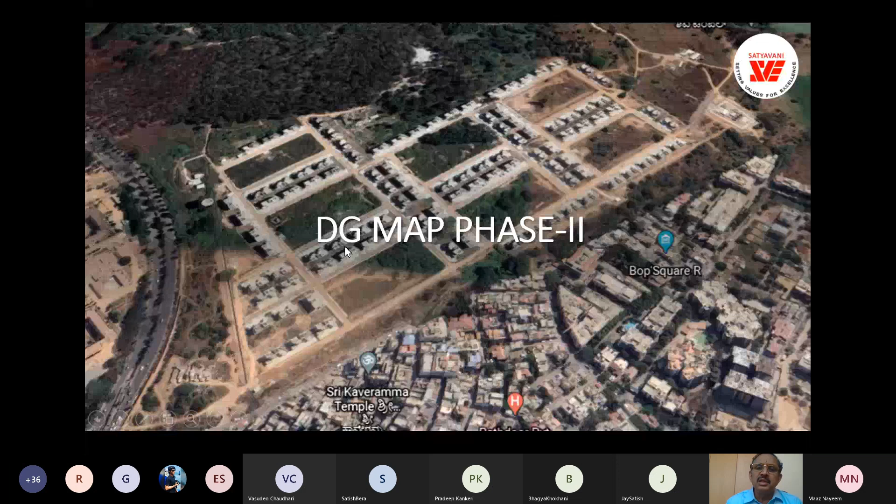So now, role of the structural engineer: deciding obligatory spans for function and efficiency. We have to decide the optimum spans, optimum structural systems, and the geotechnical investigation. We have to engage a responsible agency and insist on a proper report of geotechnical investigation.

Topographic survey by agency with standards. Concrete mix design - we also have to insist on proper mix design. And supervision by a qualified, experienced engineer in charge, with involvement in similar projects.

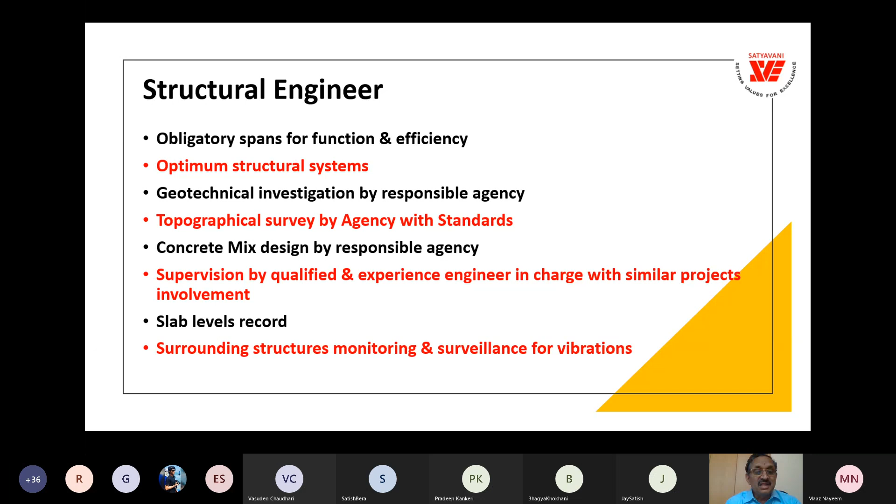Slab levels record, quality records, surrounding structures monitoring and surveillance, and calibration of batching plants and third-party checks. And verticality, orientation, eccentricity, dimension, thickness, planes, level - these are the key words a structural engineer should keep in mind always, and keep monitoring the structural work being done.

And foundation soil bearing test, pile load test, plate load test and all, and structure loading test, vibration test, and a 100 scale drawing of framing.

So you must get used to preparing the drawing yourself by hand, actually, never depending only on AutoCAD, because as a structural engineer, you get the feeling or understanding of the structure only when you draw with your hand.

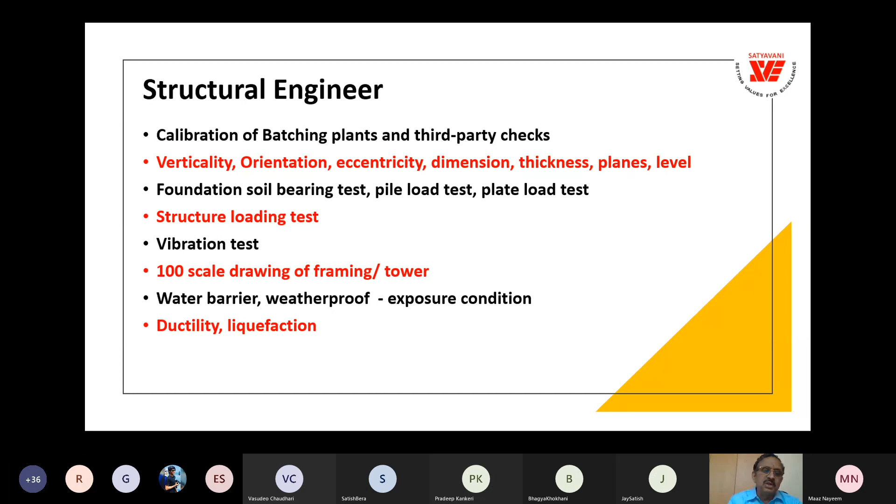And water barrier, weatherproof exposure condition, ductility, liquefaction. Visualize the structure, loads calculation, structure idealization, preliminary member sizing, materials, geometry, loads, boundaries, model, analysis and results.

Check the design, check the results, and check the design and detailing, and ensure the specification issued with construction methods, and structure coordination with services and facade finishes.

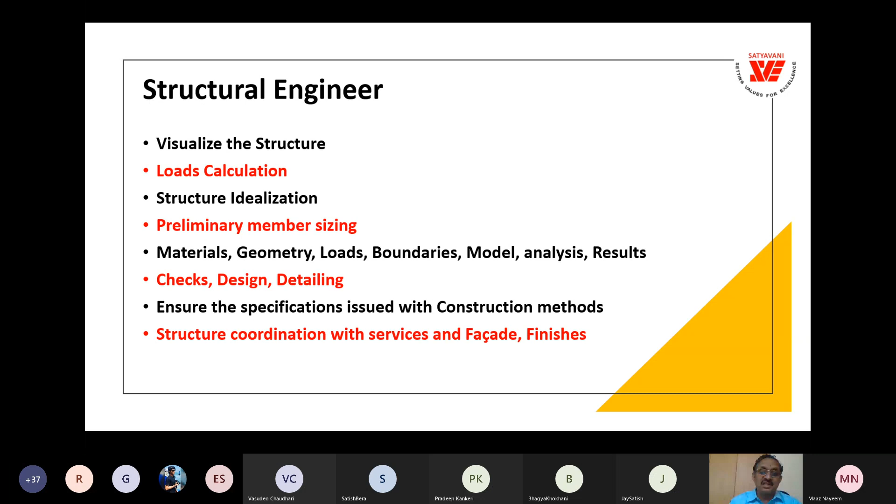So this is a typical stability certificate to be issued by a structural engineer. This is given in the National Building Code. So we are responsible for the stability of the structure.

And we have to have ethics in our profession: to maintain uniform standards, to respect fellow professionals, to avoid unhealthy competition, to maintain dignity of the profession with other professions, and to use materials optimally and as demanded by the structure, to maintain professionalism with vendors. Challenges in the profession: public trust, employability of engineers, ethics, SOP - standard operating process - and the registration of structural engineers in every urban local body, and recognition of engineers is a challenge.